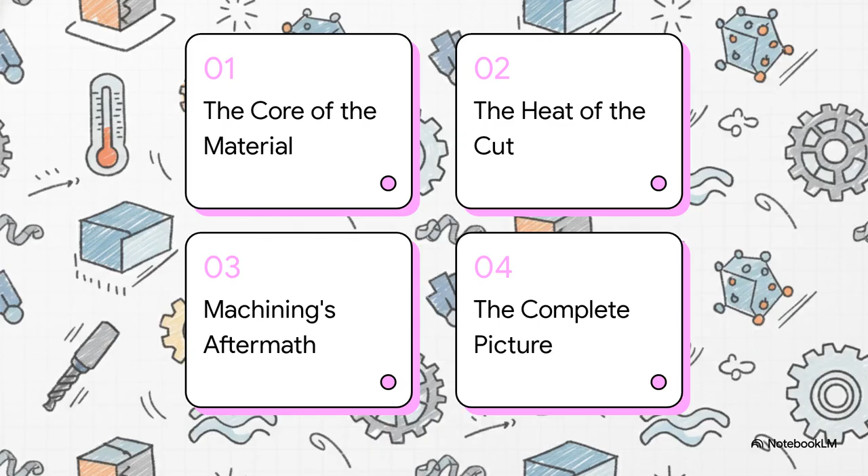To get to the bottom of that, we've structured our breakdown around three key pillars that really define machinability. We're going to start with the material itself, then we'll look at the insane heat that gets generated during the cutting process, and finally, we'll explore the hidden damage that gets left behind. All right, first up, the material's core identity. Long before a cutting tool even gets close to it, a material's built-in properties have already set the stage for the machining battle that's about to happen.

Think about it this way. Hardness is just the material's brute strength. The harder it is, the more force it's going to take to cut. But what's just as important is its microstructure. That's the internal arrangement of its crystals. It's kind of like a building's architecture. It determines exactly how the material is going to resist being torn apart on a microscopic level.

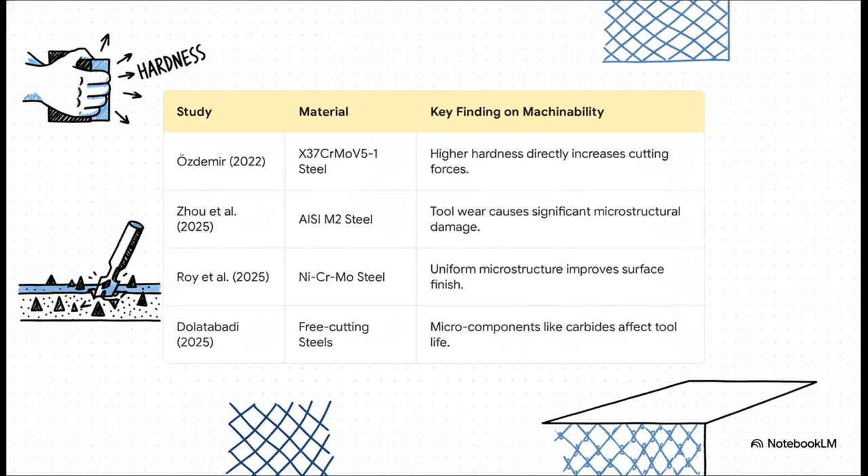Now, this table really brings the theory to life. Ozdemir's research confirms what you'd expect. Higher hardness means you need more force. Simple enough. But look closer. Zhou and Dolatabadi found that these tiny, super hard particles called carbides act like microscopic roadblocks. Because they're so much harder than the steel around them, they don't cut cleanly. Instead, they just resist the tool, causing this intense, localized stress that basically shreds the cutting edge and wrecks the part's surface. On the flip side, Roy's work shows that if you can get a nice, uniform microstructure through heat treatment, you end up with a much smoother, more predictable cut.

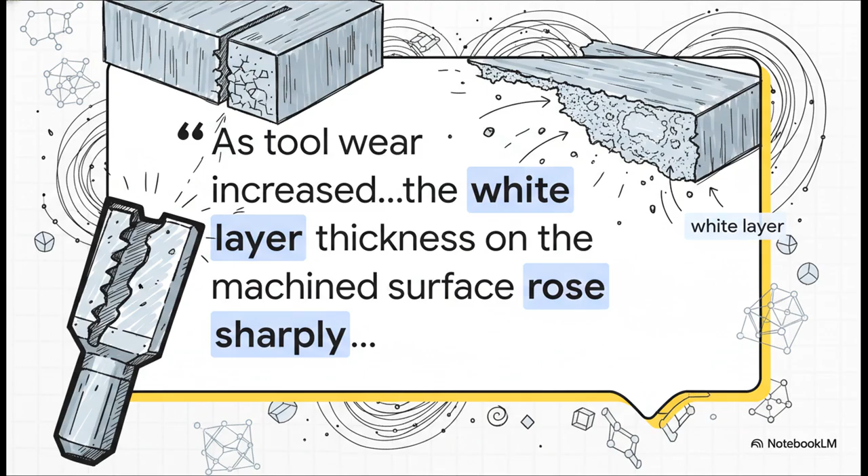And the damage isn't just on the surface. Check this out. As Zhou's 2025 study on hardened steel shows, a worn-out cutting tool doesn't just make a rougher cut. Oh no. It fundamentally changes the material's microstructure, creating this brittle, damaged white layer right on the surface. And by how much, you ask? A staggering 143.75% increase. This isn't just a surface scratch, people. This is a deep, brittle layer of damage that's caused by the cutting process itself. It's a direct consequence of that worn tool clashing with the material's internal structure.

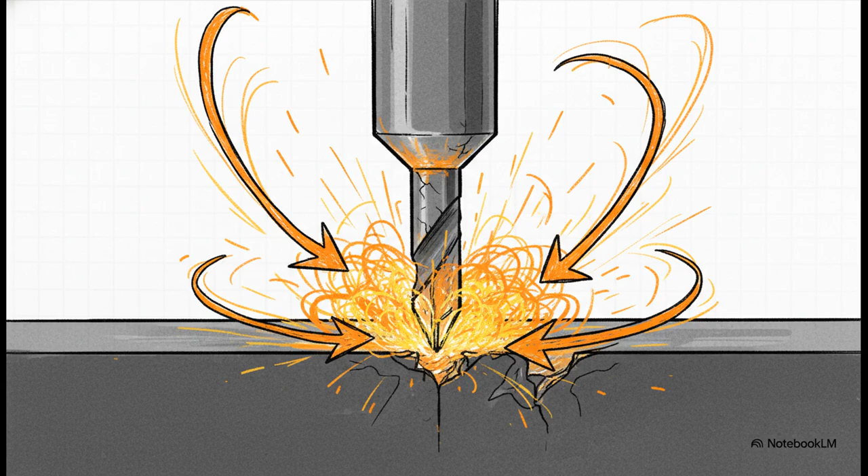Okay, let's move on to our second pillar and see how this all connects. The intense, incredible heat that's generated during the cut. Because machining isn't just a mechanical process, it's very much a thermal one too. So the crucial property here is thermal conductivity. It's all about a material's ability to get rid of heat. When you're cutting metal, you are generating insane temperatures right at the very tip of that tool. And if that heat can't escape quickly, it just gets concentrated in one tiny spot.

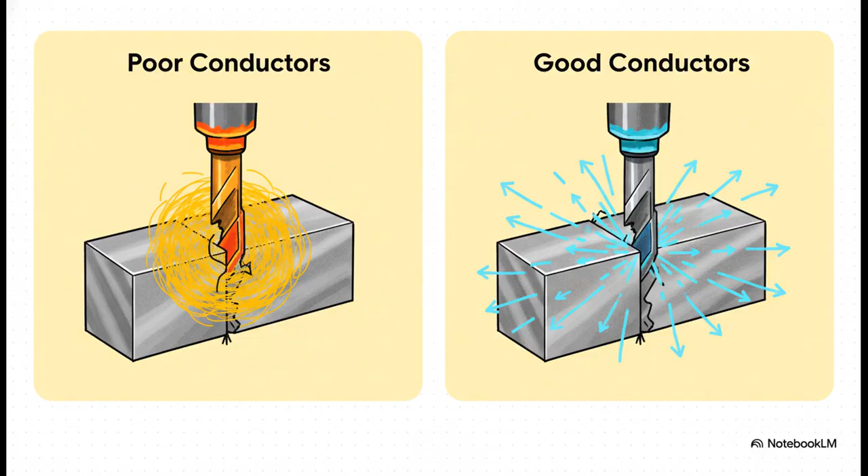And this slide right here perfectly illustrates what happens next. Poor thermal conductors, titanium is a classic example, they trap heat right at the cutting zone. This basically cooks the cutting tool until it fails, and it can even warp the part you're trying to make. Good conductors, on the other hand, they pull that heat away, protecting both the tool and the final product. It's a huge difference.

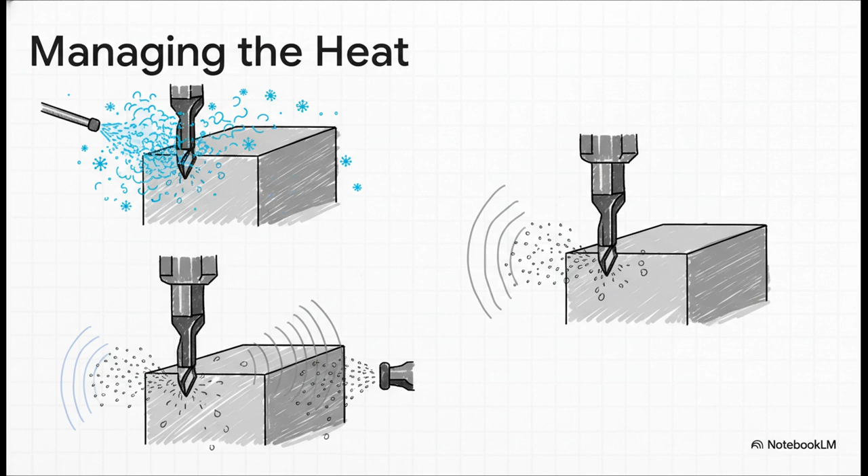Let's just zoom in on cryogenic cooling for a second. It's a pretty simple idea, but it's extreme. As friction generates this firestorm of heat, a jet of super cold liquid nitrogen hits the cutting zone. The temperature just plummets, and this not only saves the tool from melting, it actually makes it harder and more effective. The result? Better tool life and a much higher quality final part.

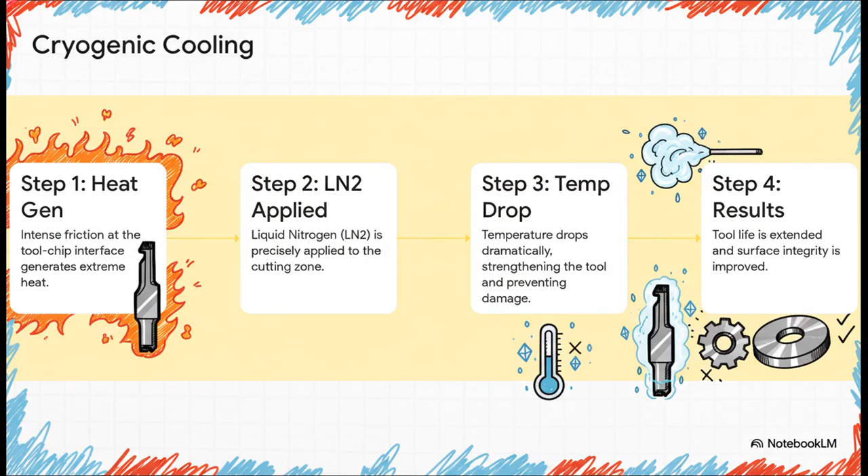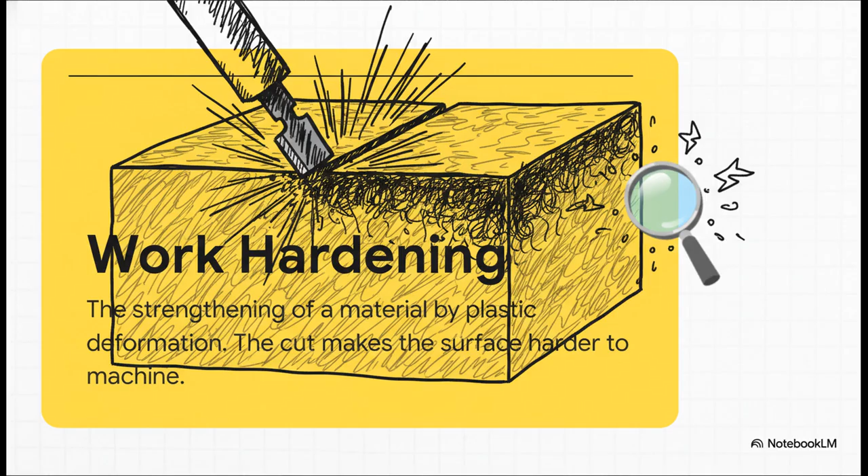Pretty cool, right? And that brings us to our third and final pillar, the invisible damage that's left behind long after the machine has stopped running. See, the cut itself is really just the beginning of the story. First, let's talk about something called work hardening. The intense pressure and deformation from the cutting tool can actually make the surface layer of the material harder than the stuff underneath it. It's this vicious cycle. Each pass you make just makes the next one even harder to do.

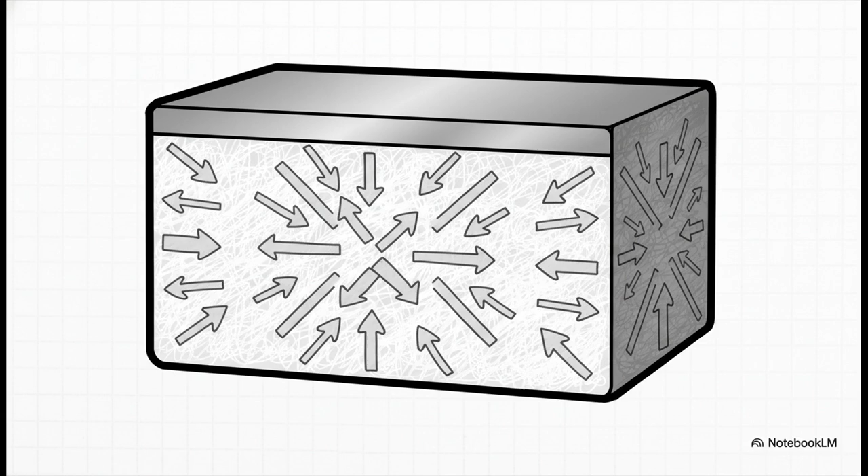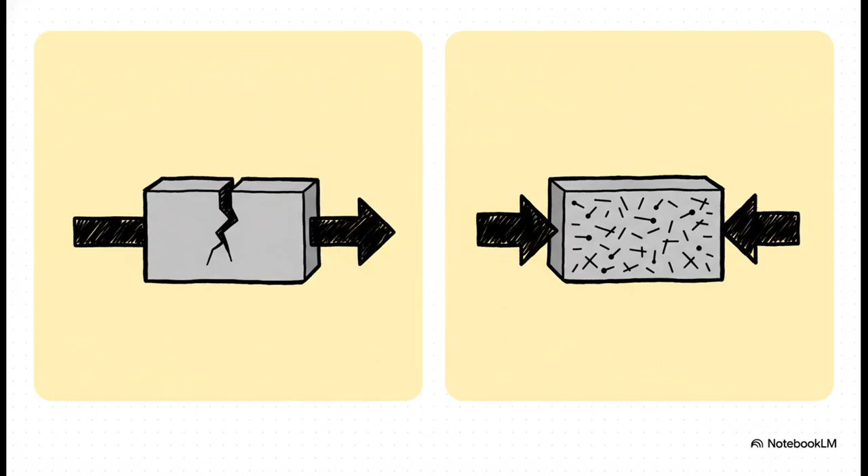The cutting process also leaves behind these hidden forces inside the part, and we call them residual stresses. You can't see them, but these internal tensions and compressions can have a huge impact on how that part performs and how long it lasts. But here's the really fascinating part. Not all stress is bad. Tensile stress, which is trying to pull the material apart, is dangerous. It's like a ticking time bomb that can lead to cracks and failure down the road. But compressive stress, which squeezes the material together, can actually be a good thing. It can make the part stronger and more resistant to fatigue. So the goal of a great machining process is to minimize the bad stress and, if you can, maximize the good.

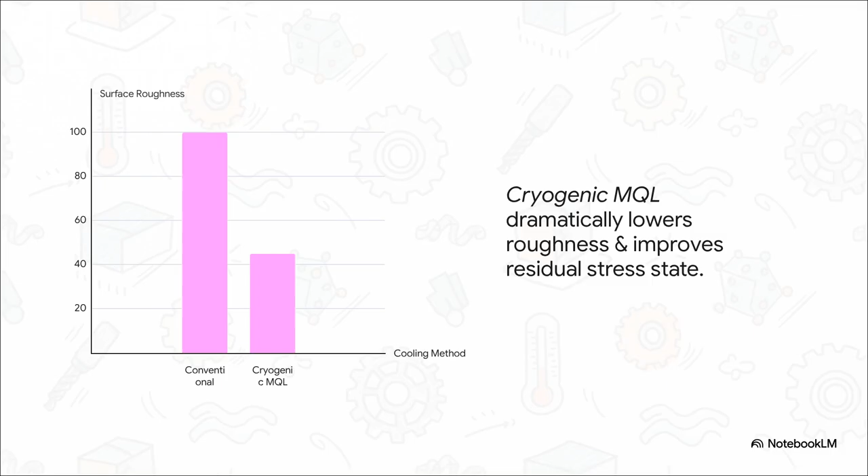And we can see that in action right here. Zhang's study on Inconel 718 shows that an advanced cooling technique, cryogenic MQL, which is basically a super chilled, high-pressure mist of lubricant, doesn't just create a smoother surface, it also creates a much healthier state of residual stress. That means the final part won't just look better, it's actually going to perform better and last longer.

So let's tie all of this together. We've looked at the material, we've looked at the heat, and we've looked at the aftermath. So what's the complete picture here? The biggest takeaway is this: machinability isn't just one thing you can measure with a single number. It's a dynamic, complex equation. It's this incredible interplay between the material's built-in properties, the thermal chaos of the cut, and the mechanical damage that's left in its wake. Truly mastering manufacturing means you have to understand and control all three of these pillars at the same time.

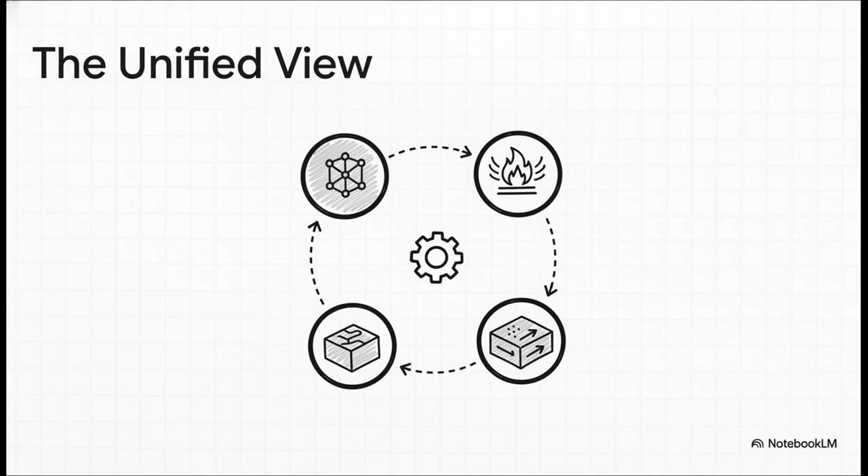And that leaves us with a final thought to chew on. As our materials scientists keep pushing the boundaries to create stronger, lighter, and more durable alloys, are they also unintentionally creating materials that are nearly impossible to shape? The ongoing challenge is to make sure that our ability to actually make things keeps pace with our incredible ability to invent them.